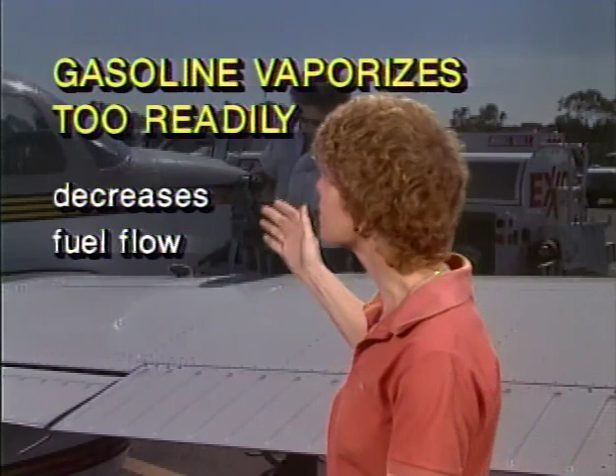Now, the measure of a gasoline's tendency to vapor lock is obtained by using the Reid vapor pressure test. The Reid vapor pressure test measures a gas's tendency to vapor lock. If aviation gasoline vaporizes too readily, the fuel lines will be filled with vapor, and that decreases fuel flow. It does not increase fuel flow, it decreases fuel flow because you've got vapor in the fuel lines.

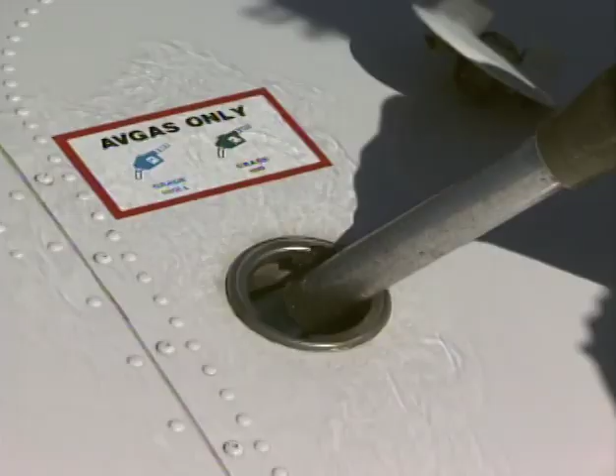The maximum vapor pressure allowable for aircraft fuel is 7 psi, and the allowable vapor pressure of aviation gasoline is lower than the vapor pressure of automotive gasoline. You have to be more careful about the vaporization characteristics of aviation gasoline because it goes up to high altitudes, so the allowable vapor pressure is lower than for automobiles.

Now, some aviation fuels are aromatic fuels, particularly the high-octane fuels, but a disadvantage of using aromatic aviation fuel is that it does deteriorate rubber parts. So you have to keep a much closer watch on those kinds of parts in the aircraft. It will deteriorate rubber, and in a lot of cases, synthetic rubber parts will have to be used.

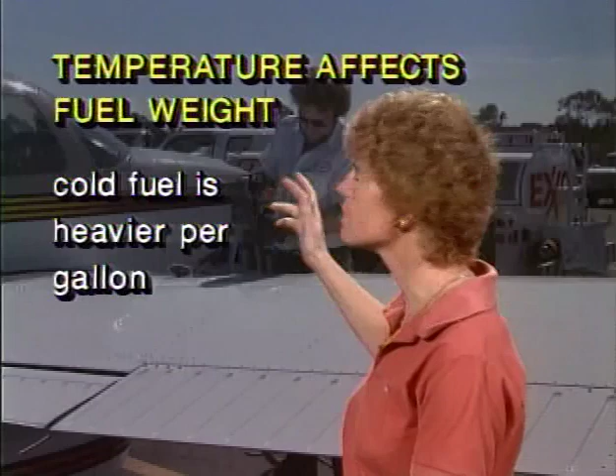Now, one of the things about fuel is that temperature affects the weight of the fuel, and cold fuel is heavier per gallon than warm fuel. The aircraft engine is really getting its energy by the weight of the fuel, so when you have cold fuel, you're actually going to have more energy available for the aircraft engine as far as the volume is concerned.

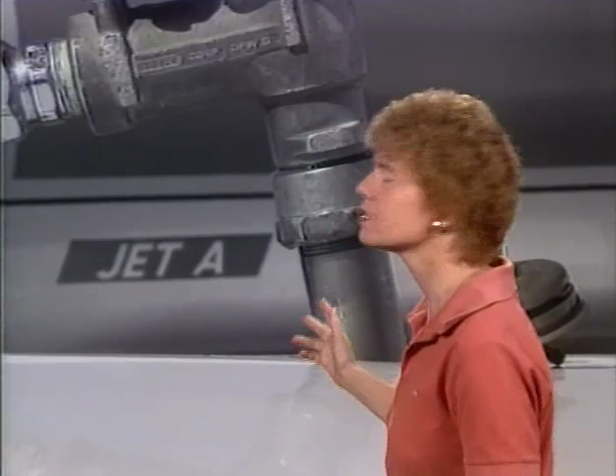Now, as far as jet fuels are concerned, jet fuels are more susceptible to water contamination than aviation gasoline is. The reason for that is because jet fuel, turbine fuel, is more viscous than gasoline is. It's thicker, and therefore it tends to hold that water in suspension. Using turbine fuels in aircraft has resulted in problems that you don't associate with aviation gasolines.

And one of the problems that comes along with turbine fuels as opposed to aviation gasolines is microbial contaminants, basically organic material growing in the turbine fuel. It's produced by various forms of microorganisms. They live and actually multiply in the water that is suspended in the jet fuel, what the FAA calls water interfaces of the jet fuels. They're multiplying in that water.

Now, if you've got microbial growth in a jet fuel tank and it's not corrected, all that growth will actually interfere with the fuel flow and the fuel quantity indicators. Also, that growth can cause electrolytic corrosive action in the metal tanks if you don't stop that growth.

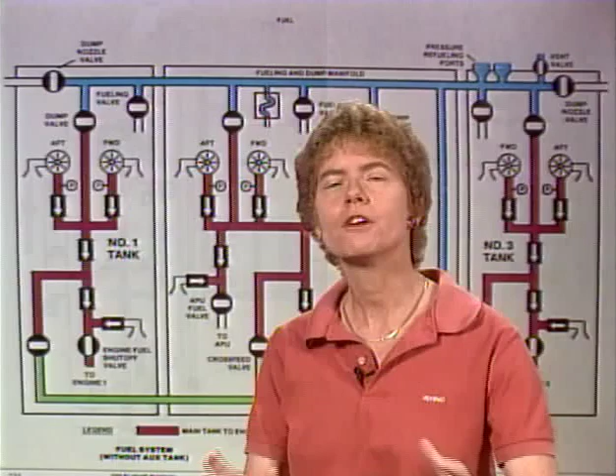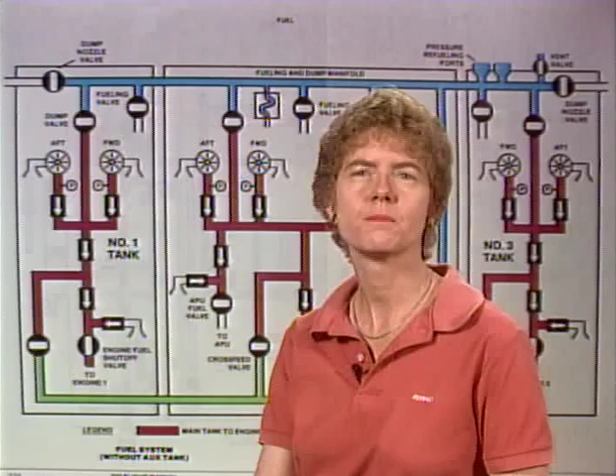Now let's talk about fuel system design. If you've got large aircraft like a 727, very typically you're going to have all kinds of lines running around between the tanks, between the engines, multiple manifolds in there. The whole purpose of that fuel manifold system is to let you move fuel wherever you want. First of all, the tanks can be serviced through a single connection. You can do pressure fueling with all the tanks serviced through a single connection.

In addition to that, any engine can be fed from any tank in the airplane, and that gives you redundancy, a lot of value in case you've got a problem with any one tank. All engines can be fed from all the tanks simultaneously. It just depends on how you set up the valves in the system. Gives you lots of options. And in addition to that, a damaged tank can be isolated from the rest of the fuel system.

If for some reason you get a leak in the tank or a lightning strike or any kind of damage, you can isolate it from the rest of the fuel system, and that's what a fuel manifold system allows you to do.

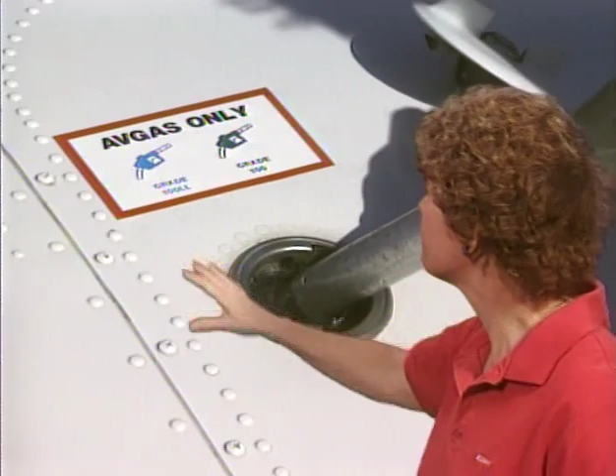Now, when it comes to fueling an airplane, in an effort to avoid people putting the wrong fuel into airplanes and thereby causing accidents, there are some minimum required markings that have to be placed on or near the fuel filler cover. For reciprocating engine-powered airplanes, those are the word avgas, so that you don't accidentally put jet fuel in it, and also the minimum fuel grade required. For instance, 100 octane or 100 low lead.

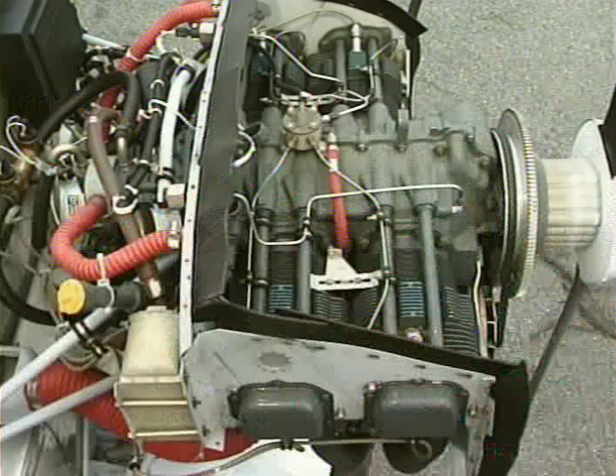If it was a turbine-powered airplane, instead of avgas, obviously it would say jet fuel. And the whole idea behind these required markings is that they want to make sure the airplane does not get misfueled.

Now let's assume that you're routing a fuel line like this one here between two rigidly mounted fittings. The way you want to do that is to have at least one bend between the fittings, and the idea behind that is strain relief that will help prevent the line from cracking. You do not have to use flexible hose, but what you do want to make sure of is that you've got at least one bend in it to help relieve the strain.

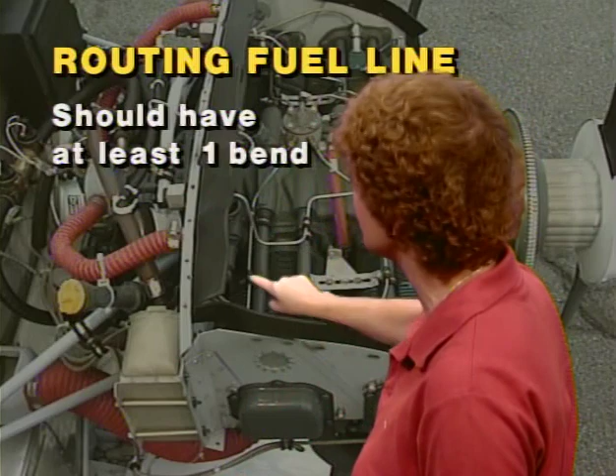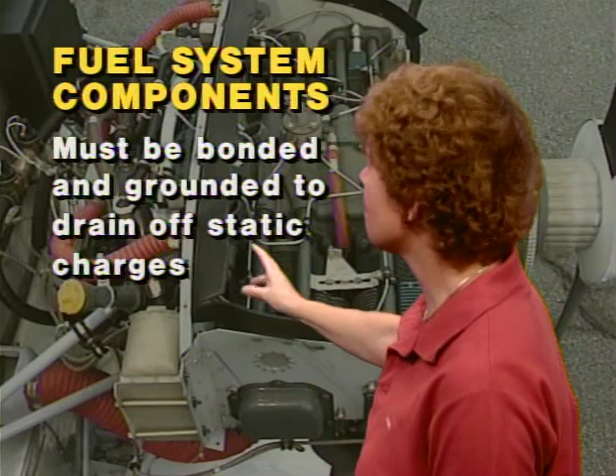Now, fuel system components must be bonded and grounded, and the idea of that is to drain off static charges to prevent sparks and thereby prevent fires and possibly explosions.

The main fuel strainer will be located down at the lowest point in the fuel system. Usually it's going to be on the bottom of the cowling, one side or another in the engine compartment area. And the purpose of it is to trap any small amount of water that may be present in the fuel system. And that is the main strainer down at the lowest point in the fuel system.

A lot of times with a lot of aircraft, you've got a gravity feed fuel system that can supply fuel to the engine from more than one tank at a time, like this 172. And in that case, the air spaces between the tanks have to be interconnected in order to vent those tanks properly.

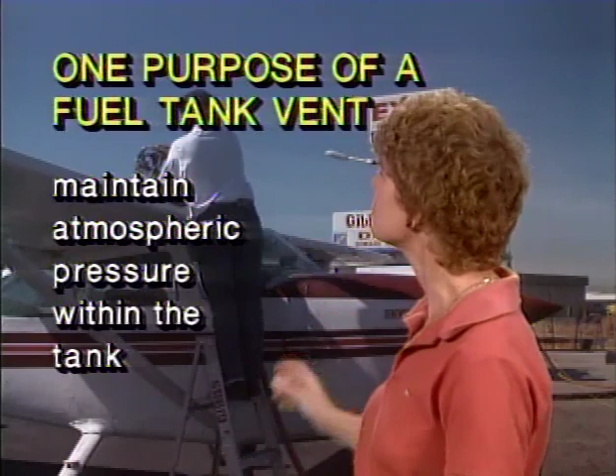Let's talk about those fuel tank vents. One purpose of the fuel tank vent is to limit the pressure differential between the tank and the atmospheric pressure. What our vents are trying to do is to maintain atmospheric pressure within the tank, and the whole purpose of that is so that the fuel will flow down to the engine properly in that feed system.

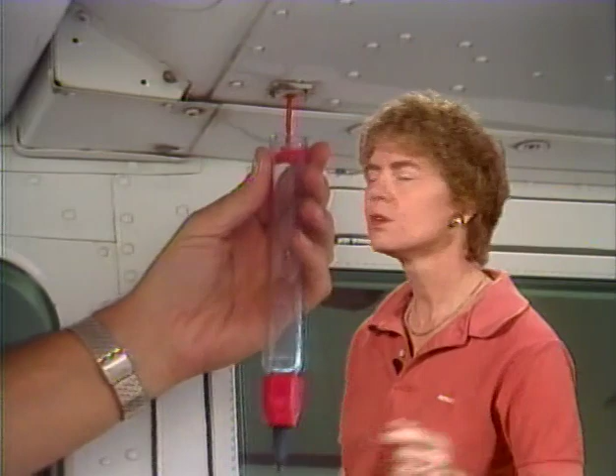Now, on the bottom of the tanks, you're going to have a fuel tank sump. And the primary purpose of that fuel tank sump is to give a place where the water and dirt accumulations, whatever's accumulated in the tank, can be collected and drained out, and give you a chance to check it and see if you're getting any contamination in the tank.

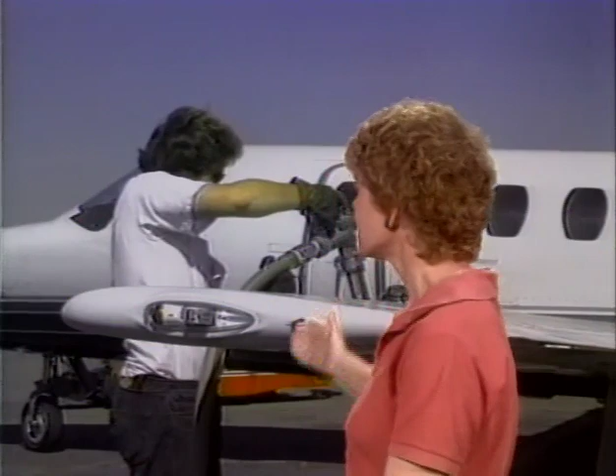There's a number of different ways that fuel tanks can be placed in an aircraft. One way is what is called an integral fuel tank. A Citation, for instance, and a lot of other planes have an integral fuel tank, and a more common name for it is a wet wing. The integral fuel tanks, or the wet wing, are formed by the aircraft structure itself. There's no other tank, there's no other bladder or anything. It's simply formed by the aircraft structure.

And the reason that integral fuel tanks are used in a lot of aircraft, particularly in larger aircraft, is to reduce the weight. It gives you a lot less weight if you can use the structure of the wing itself in order to create the fuel tank.

Now, in the fuel tanks, you're going to have flapper valves that are used as check valves in order to keep the fuel from going back away from where you want it to be, for instance, around the boost pumps. Flapper type check valves, for instance, are used in integral fuel tanks, and what they're used for is to prevent the fuel from flowing away from the boost pumps. So as the fuel accumulates around the boost pumps, those flapper type check valves keep the fuel there, prevent it from flowing away.

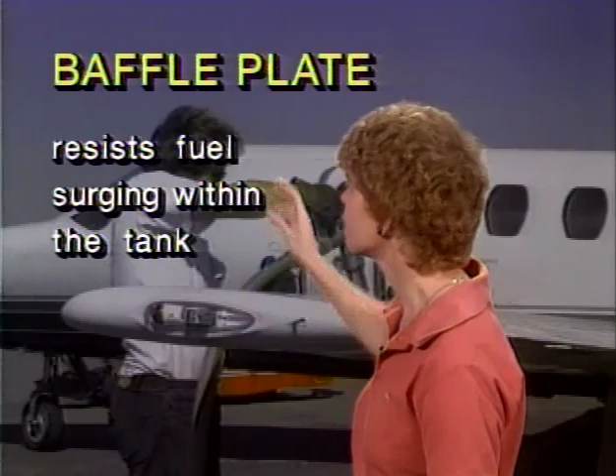Now, fuel tanks will also have baffle plates in them, and the purpose of a baffle plate in a fuel tank is to resist the fuel surging back and forth within the tank. It slows the fuel down and keeps it from sloshing and surging around.

Some aircraft, for instance the Cessna 182, have got bladder type fuel tanks. The bladder type fuel tank is just what its name says, a bladder that goes inside the aircraft wing, and that's what holds the fuel.

Now, if that's going to be left empty for an extended period of time, for instance, the airplane is going to be not flown for a long period of time, then the inside of that tank needs to be coated with a film of engine oil, and the reason for that is to make sure that the bladder tank does not deteriorate. Coat the inside of it with a film of engine oil.

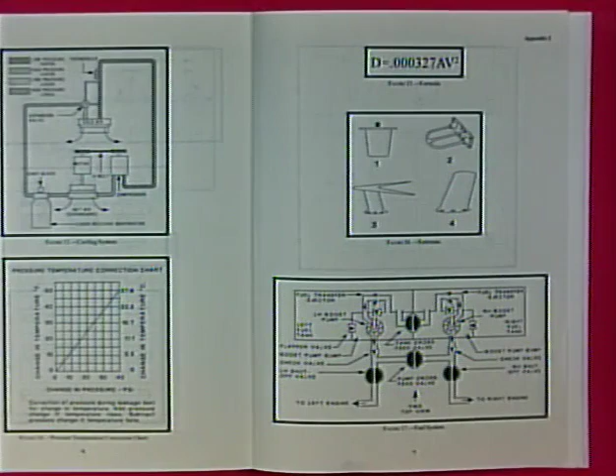If you have a multi-engine aircraft, what you're going to have is a fuel cross-feed system. So take a look in the FAA's Appendix 2 at Figure 17. And it shows the fuel cross-feed system on a twin-engine aircraft. The primary purpose of a cross-feed system is to allow you to feed any engine from any tank. You can feed any engine from any tank. That gives you a lot of flexibility.

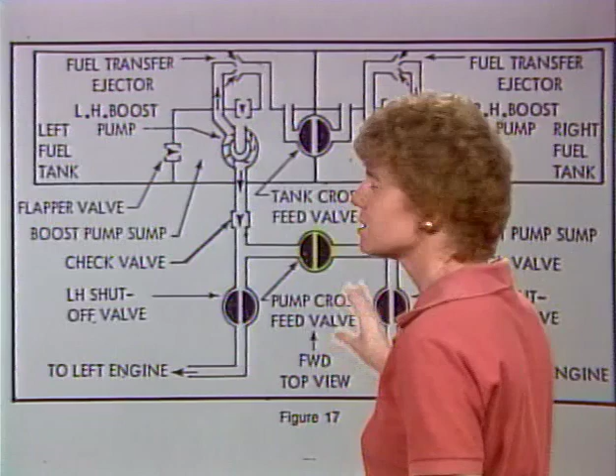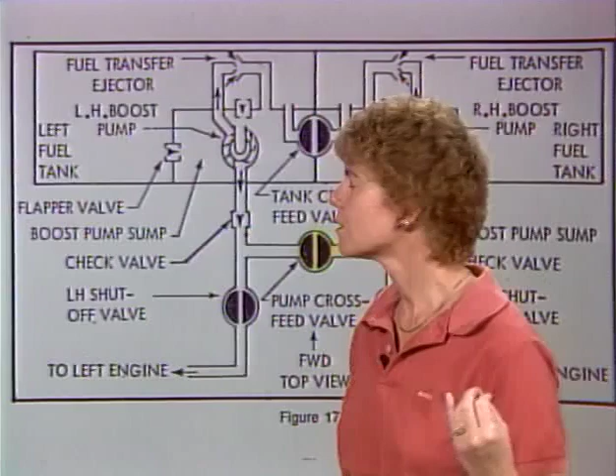Now, there are various valves in this cross-feed system, and they're going to ask you what the purpose is of the pump cross-feed valve. There is a tank cross-feed valve, and then down in the center of Figure 17 there is a pump cross-feed valve, and the purpose of the pump cross-feed valve is to allow the operation of both of the engines from one tank. This cross-feed valve is not to allow you to pump fuel from one tank to another. That's what the tank cross-feed valve does, but the pump cross-feed valve allows you to operate both the engines from one tank.

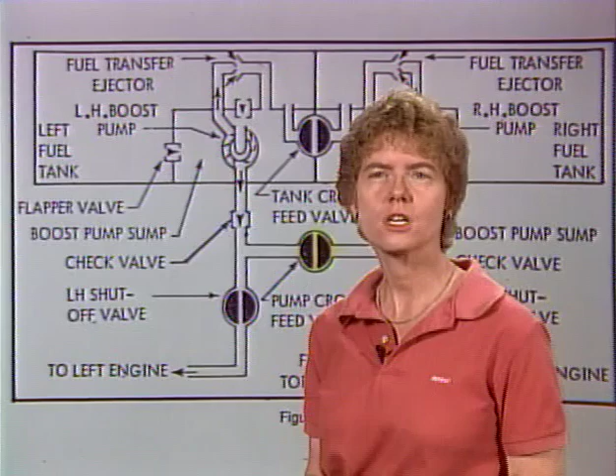Now, the cross-feed systems are used in multi-engine aircraft primarily to maintain a balanced fuel condition. If you've got more fuel in one tank than another, you can feed both of the engines out of one tank, balance the load, and then go back to feeding each engine off of its normal tank.

Let's talk about fixing fuel tanks. Sometimes you need to repair a fuel tank. Now, if you're going to have to repair a fuel tank, you need to empty the fuel out of it first. And you want to avoid conducting any defueling and tank purging operations in any enclosed space. Do not do it in an air-conditioned building or any enclosed space. You want to be out in the open air in a well-ventilated area.

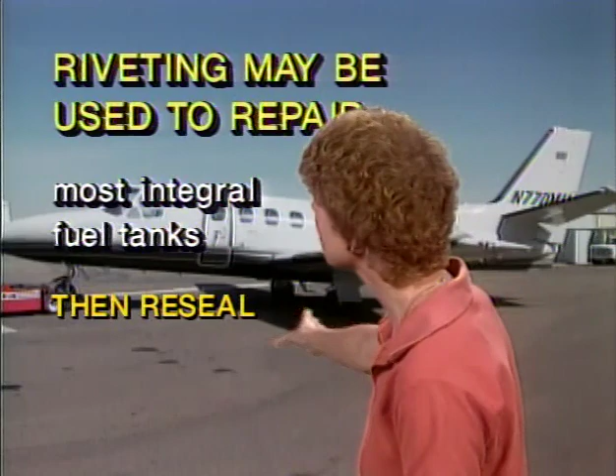Now, an integral fuel tank, one that's basically the wet wing, you should purge with carbon dioxide, with CO2, before you try and do any repairs on it. You want to make sure that the fuel vapors are out of the tank before you start doing any repairs. When you're repairing integral fuel tanks, riveting can usually be used to repair those tanks because they are part of the basic aircraft structure, so you can use riveting as you would on the aircraft structure to repair those integral fuel tanks.

Now, some aircraft, such as an older 172, actually have metal tanks in the wings for their fuel tanks. Not rubber bladders and not wet wings, but actual metal tanks in the wings. If those need work on them, for instance, welding, what you want to do is take the tank out, but before you do any welding, make sure that you steam clean it very thoroughly. That way you'll get rid of any fuel or fuel vapors that might cause you a fire or explosion problem.

Now, when you're done, if you want to inspect that removable rigid fuel tank for leaks, the best way to do it is to pressurize the tank with air and then brush it with soapy water and look for bubbles. If you see bubbles, it means that the air is coming through into that soapy water and you've got some leaks. It's not practical to submerge the tank in water or to fill it with water in order to look for any streams or dribbles coming out. The easiest way is to simply pressurize it with air and then look at that soapy water to see if you have any bubbles indicating leaks.

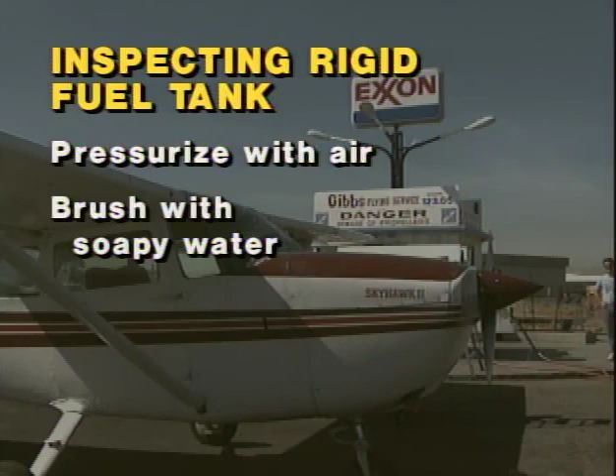Now let's talk about fuel pumps. First of all, boost pumps. The fuel boost pumps in an aircraft are operated to provide a positive flow of fuel to the engine. They prevent bubbles in the fuel after it leaves the tank if atmospheric pressure is lower than the fuel vapor pressure. And so that fuel pump basically helps make sure that the engine keeps running.

How much fuel pressure you've got on the outlet side of a centrifugal type fuel pump basically is regulated by the pump's design and its own internal clearances. It is not regulated by the speed of the engine, because when you're working with a submerged single-speed centrifugal type fuel pump like this is, it's regulated by the pump's design and its own internal clearances. That's what controls the outlet fuel pressure.

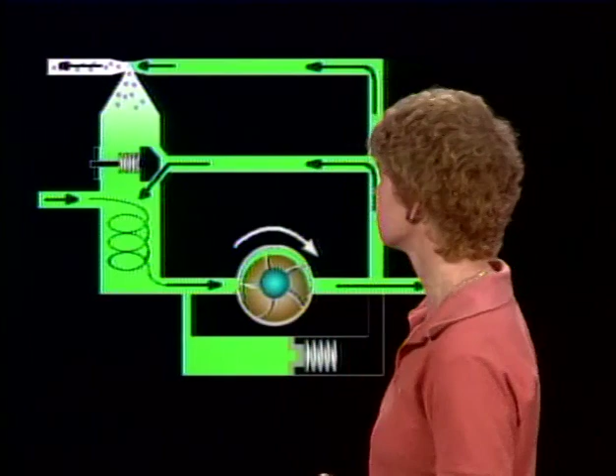A centrifugal type pump like this is not a positive displacement pump. The primary fuel pump on the engine does tend to be a positive displacement fuel pump, and a positive displacement fuel pump has to have a fuel pressure relief valve. It's required by the FAA regulations on a positive displacement fuel pump because it's always putting out the same amount of fuel through the pump, and the engine is not always able or ready to accept that much fuel pressure, and so you have to have a fuel pressure relief valve on a positive displacement fuel pump.

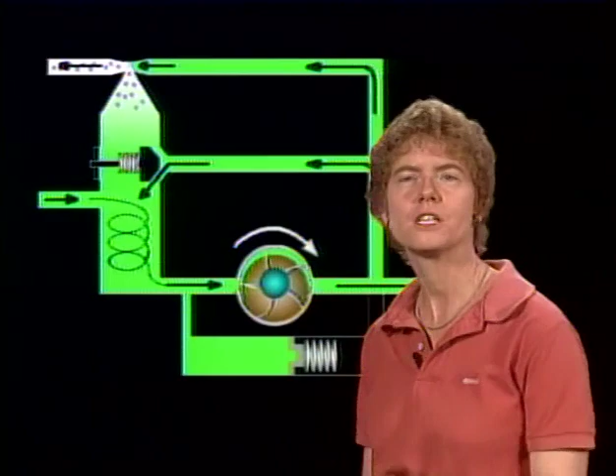Okay, so the FAA will say to you on the test, does a centrifugal fuel pump have to have a fuel pressure relief valve? Well, is a centrifugal fuel pump a positive displacement pump? No, it's not, and therefore it does not have to have a fuel pressure relief valve. On the other hand, they'll give you another question that says, do you need a fuel pressure relief valve on a sliding vane type fuel booster pump? A sliding vane pump is a positive displacement pump, and if it's a positive displacement pump, does it have to have a pressure relief valve? Yes, it does. So a pressure relief valve is required in a sliding vane fuel booster pump.

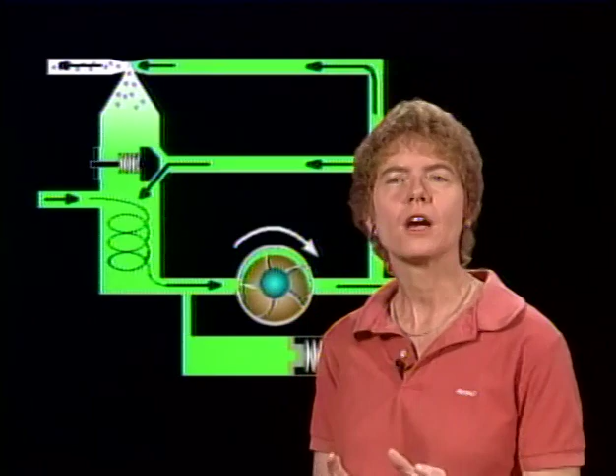Now, a vane type pump like this will also have a diaphragm in it, and the purpose of the diaphragm is to compensate fuel pressures for altitude changes, so that as the aircraft changes altitude, you get changes in the fuel pressures.

Let's talk now about our fuel quantity indicators, to figure out how much fuel there is in the aircraft. There's 4 basic types of fuel quantity gauges. There's electronic types. We're going to talk about all of these. There are electrical gauges, there are mechanical gauges, and there are sight glasses. Sight glass is pretty obvious. There's just a glass coming up. The old Yankees had it and a lot of other aircraft where you can actually see how much fuel there is up through the sight glass.

Mechanical ones, you see that, for instance, in the old Pacers, where you've got basically a cork and a little metal wire sticking up out of it, and depending on how much fuel you've got in the tank, the cork and the wire bob up and down. Electronic and electrical, we're going to talk about in more detail in just a minute.

Now, as far as the calibration on these fuel quantity gauges is concerned, they have to be calibrated to read 0 in level flight if the quantity of fuel remaining in the tanks is equal to the unusable fuel supply. In other words, when you've used up all your usable fuel, the gauges should read 0. You don't want the gauges reading 5 gallons if the 5 gallons is not usable to the aircraft. So when you get down to the unusable fuel supply, those gauges should read 0. They should be calibrated that way in level flight.

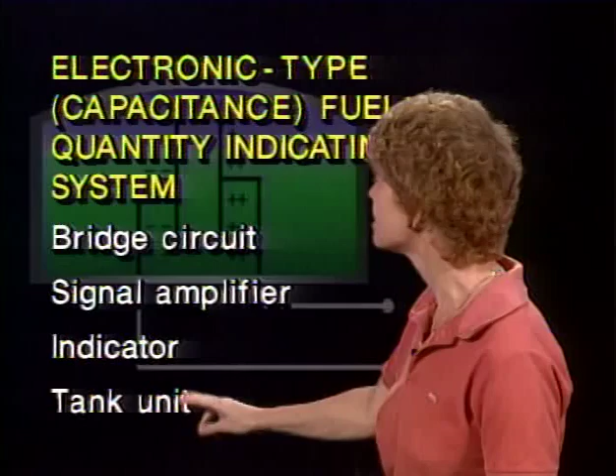Let's talk now about the electronic type or capacitance type fuel quantity indicating system. There's 4 basic elements on that capacitance type fuel quantity system. You've got a bridge circuit, you've got a signal amplifier, you've got an indicator in the cockpit, and you've got a transmitter unit, a tank unit that is sending the signal. Let's take a look at this unit and see what we've got there.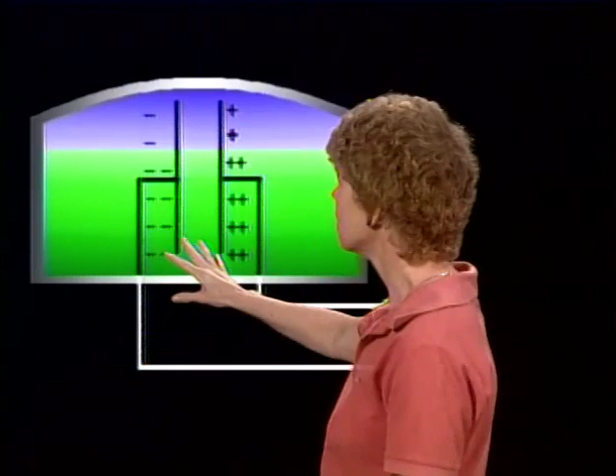In the tank, there are no moving parts as far as a capacitance type or electronic fuel quantity system is concerned. What you've got is a probe, or maybe several probes, that are installed in the fuel tank. This is the probe here, and here are the electrical wires that are coming out of it. We have fuel in most of the tank, but then we have air up above it. The probe or the tank transmitter basically is an electric capacitor. It's got fuel and air located above the fuel, which act as a dielectric. Now, a dielectric means a non-conducting material.

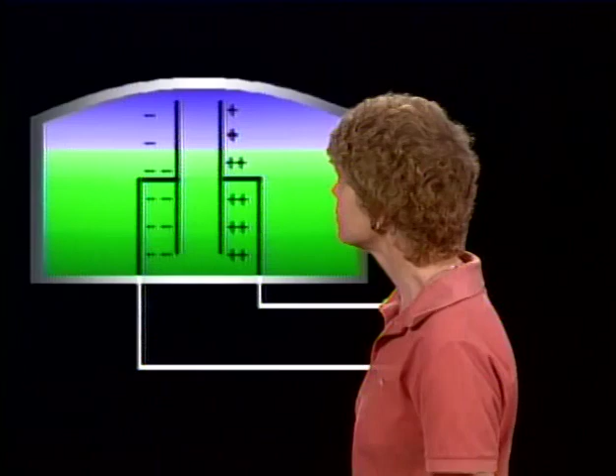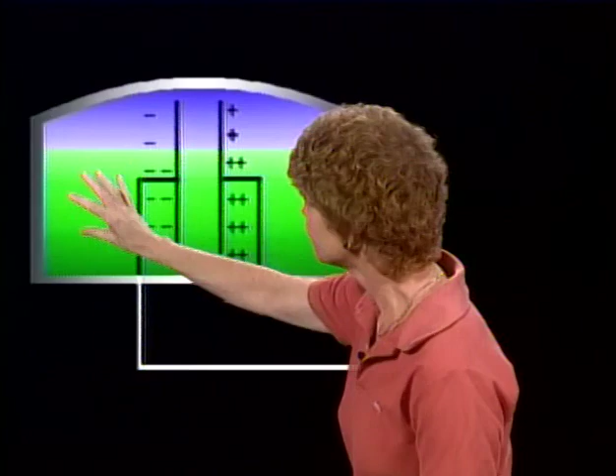So basically what you've got is you have charges trying to move from one side of the electric condenser, which is the probe, to the other. But you have the fuel and you have the air, which are the dielectric, the non-conducting material, between the 2 parts of the probe or the condenser. What happens is that the non-conductivity of the fuel and the air is different.

So how much electricity can move from one side to the other depends on what the ratio is between the fuel and the air in that tank. The capacitance type gauges tend to be very accurate because of the fact that they do not have any moving parts in them. And also, they're very accurate in measuring fuel level because they measure by weight. They measure by pounds rather than by gallons.

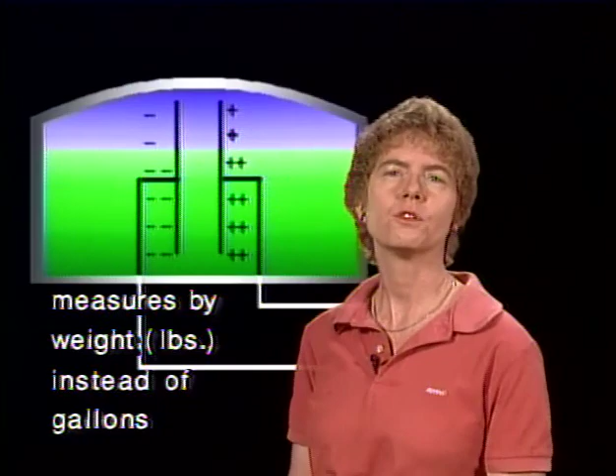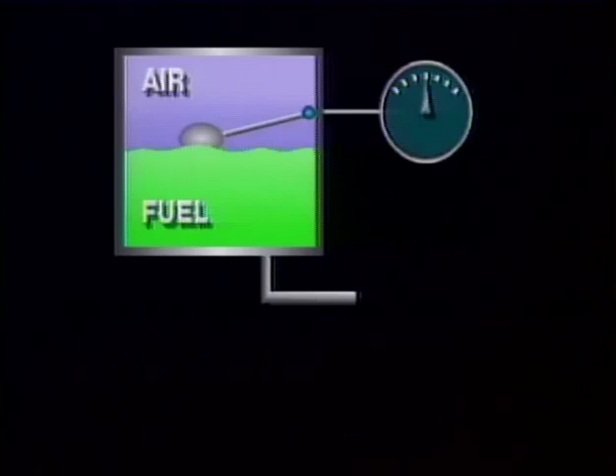And when it measures by pounds like that, instead of measuring in gallons, the measurement will be more accurate because the volume of the fuel varies with the temperature change. So fuel quantity measured in pounds instead of gallons is more accurate. You've always got the same number of pounds, but the gallons of fuel will change depending on what the temperature of the fuel is.

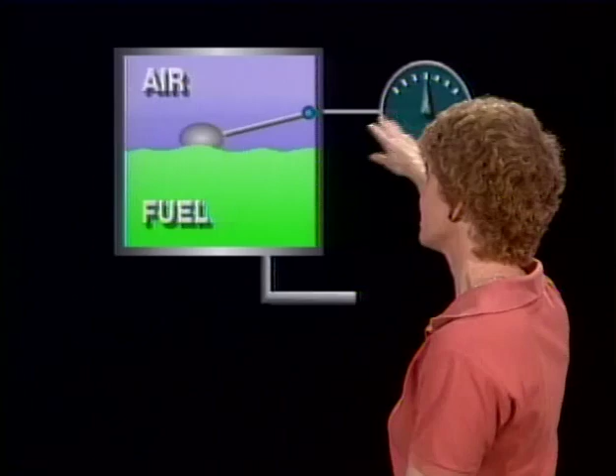Now, another type of fuel quantity system is the electrical type fuel quantity system, and what that's got is an indicator in the cockpit, and there is a float-operated transmitter in the tank. And the purpose of that float-operated transmitter is to send an electric signal to the fuel quantity indicator. It is not a mechanical connection. It's an electrical signal going from the transmitter in the tank, which is activated by the float, to the indicator in the cockpit.

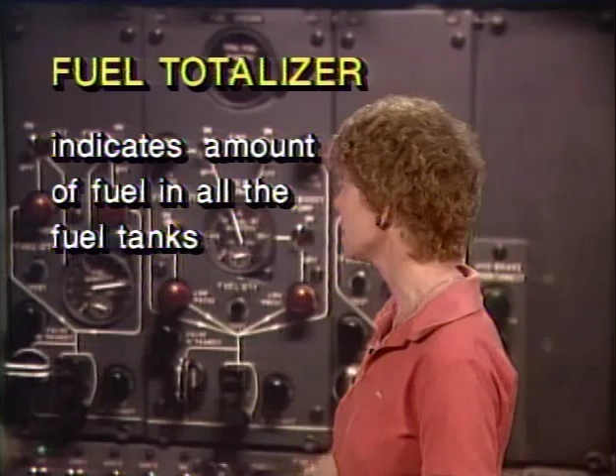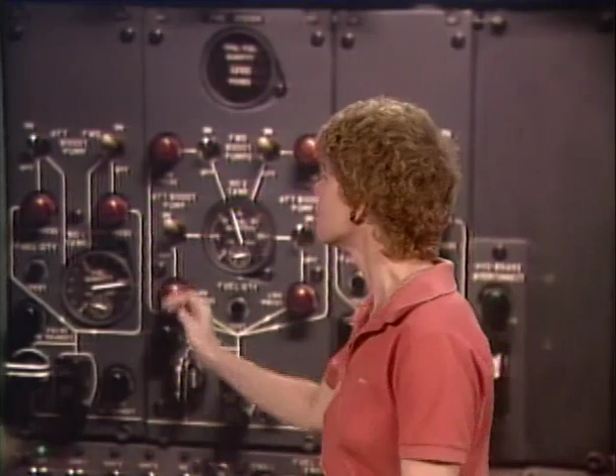Some aircraft have a fuel totalizer. The 727 is one of those, and the fuel totalizer indicates the amount of fuel in all of the different fuel tanks. In this case, 3 different tanks, and the fuel totalizer tells you how much you've got in all the tanks together. And that is one very definite advantage of the electrical or electronic fuel quantity indicating systems. Several fuel tank levels can be read on one indicator, and the indicator can be located any distance from the tank. You don't have to worry about a mechanical or visual connection, so you can put the indicator any distance from the tank that you want to.

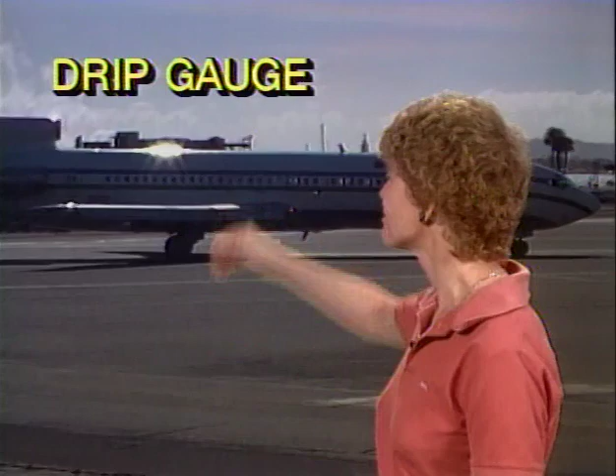Now, on large transport category aircraft, another way to measure the amount of fuel in the tank is to use a drip gauge. And a drip gauge, unlike what its name sounds, is not something you use to check if something's leaking, like fuel or oil. It's basically a visual way of measuring the amount of fuel in the tank using a gauge in the wing and basically filling it with fuel and seeing exactly when it starts dripping out the end. Drip gauge: measuring the amount of fuel in the tank.

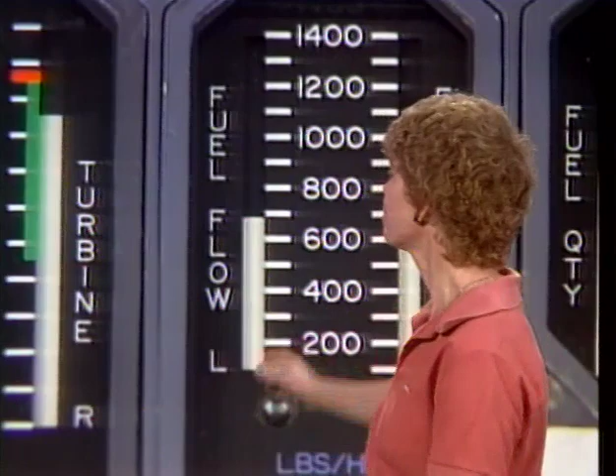Now, how do you tell how much fuel you're using? Well, one way is with fuel flow indicators. Fuel flow transmitters in the fuel lines are designed to transmit data electrically, so you get an indication of how much fuel flow is actually going through the engines. Some aircraft, instead of having fuel flow indicators, have fuel pressure indicators.

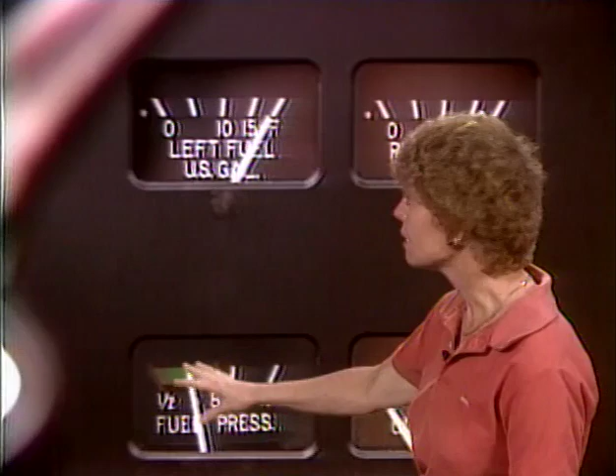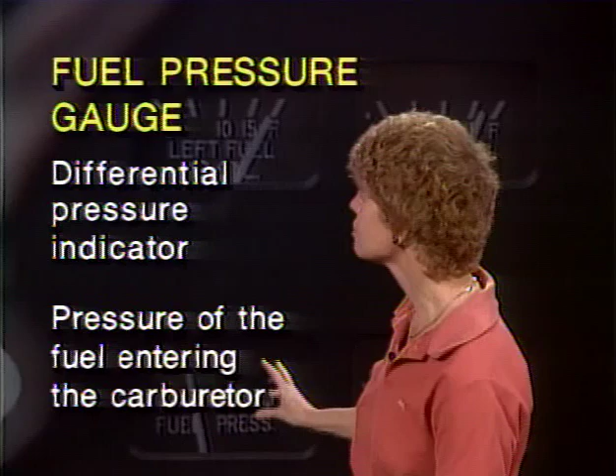A fuel pressure gauge, like you have in, say, an Archer, is a differential pressure indicator. It's a differential pressure indicator because it's using fuel pressure and ambient atmosphere in order to get a differential pressure indication. And the fuel pressure gauge indicates the pressure of the fuel as it's entering the carburetor.

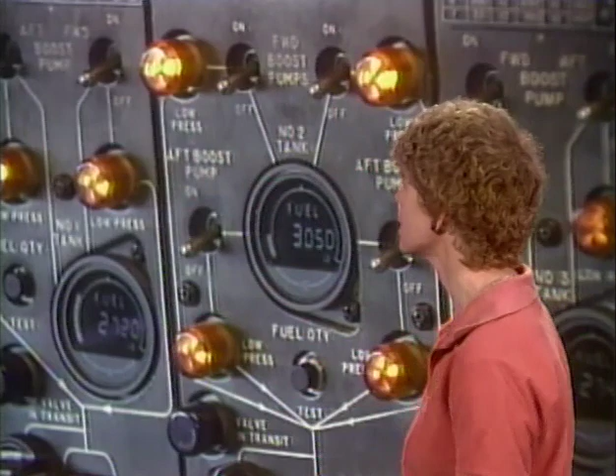Now, large aircraft, particularly multi-engine aircraft, will very often have a fuel pressure warning system. And that's what we've got with these amber lights on the 727. When they illuminate, you've got low fuel pressure. A fuel pressure warning signal system prevents you from allowing the fuel supply in one tank to become exhausted before you switch the selector valve to another tank, because when the pressure gets low, that light illuminates and tells you that you're running out of fuel.

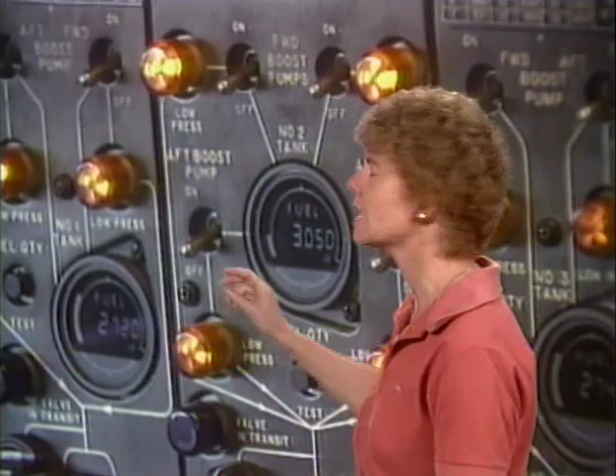The fuel pressure warning, therefore, gives you the first positive indication that you need a changeover from one fuel tank to another, because it tells you you're losing fuel pressure because you don't have enough fuel in the lines coming in. What it uses is a pressure-sensitive mechanism that actuates the fuel pressure warning system. And that pressure-sensitive mechanism can be adjusted to change where the fuel pressure warning lights come on. You can change the fuel pressure warning limits by adjusting the pressure-sensitive mechanism.

The transmitter in the fuel pressure warning system basically takes fluid pressure in the lines, however much fuel pressure there is in the line, and converts that to an electrical signal. And when the fuel pressure drops below the limits that you've set the mechanism for, the fuel pressure warning switch contacts close and the warning light comes on. Now, if you're dealing with a reciprocating engine aircraft as opposed to a turbine engine aircraft like we have here, the fuel pressure line of the carburetor is where the pressure is taken for the fuel pressure warning signal.

Now, if you're going to troubleshoot a system like this, you need to use the manufacturer's maintenance manuals because they're all going to be different, and you need to look at the maintenance manuals if you're going to do any effective troubleshooting on it.

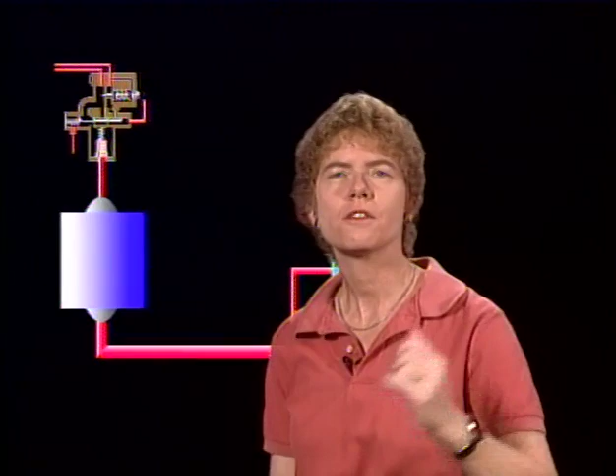Fuel system icing is another problem that gas turbine engines have, and the fuel systems in turbine engines are very susceptible to forming ice in the fuel filters. And you want to prevent the ice from forming in the fuel filters, and a very common way of doing that is to add anti-icing fuel additives. You can heat the fuel, which we'll talk about in a minute, but another way to take care of the problem is to add anti-icing fuel additives.

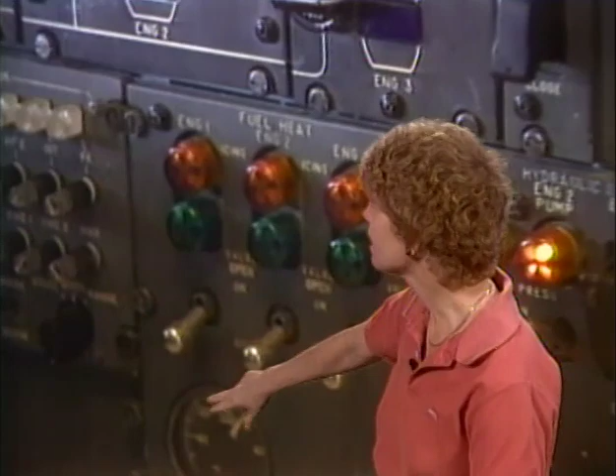Now, on some aircraft, what they do is heat the fuel. For instance, on the 727, you've got a fuel temperature indicator, a gauge right down here below the fuel heat panel. The fuel temperature indicator tells you when the fuel may be in danger of forming ice crystals because it tells you what the temperature of the fuel in the tanks actually is. Okay, that's nice. You know the temperature of the fuel in the tanks. What do you do about it? Well, you've got a fuel heat system.

And what the fuel heater does is it protects the fuel system from ice formation because it operates as a heat exchanger. It takes hot bleed air off the engine and runs it in a heat exchanger past the fuel, which warms up the fuel and prevents the ice from forming. The aircraft fuel heater can be used, by the way, to thaw ice in the fuel screen. If you actually have already gotten ice in the fuel screen, you can use that fuel heater to go ahead and thaw the ice.

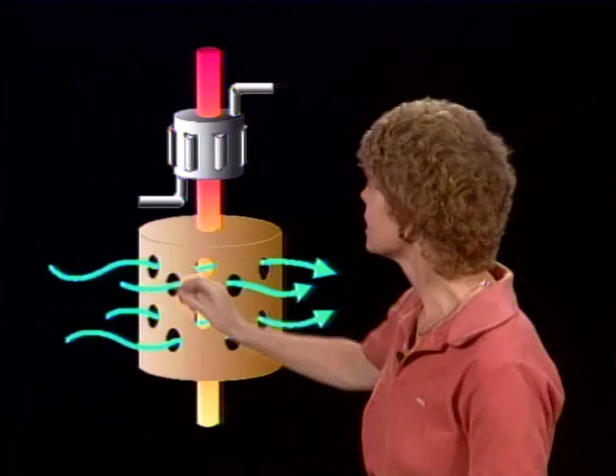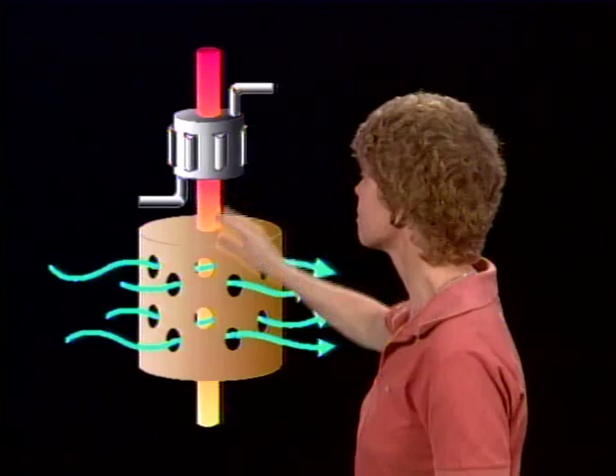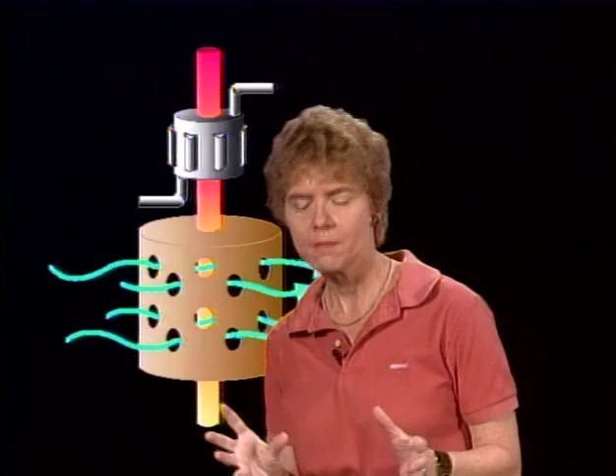Now, one way to heat the fuel is to use this engine bleed air. But another way to do it is to use the engine lubricating oil as a source of heat. Some aircraft have one or the other, some aircraft have both. So either engine bleed air or engine lubricating oil can be used as a source of heat for the fuel in order to keep ice crystals from forming in the fuel.

Some aircraft require that you have a good way to get rid of the fuel, to dump it. On this 727, the dump chute is out here on the right wingtip. There's another one over on the left wingtip, and that's how you jettison fuel, get rid of the fuel if you need to. You might need to get rid of it if you've just taken off and have an emergency and have to go back and land, and you have to get down below your landing weight.

Both transport category aircraft, like this airliner, and general aviation aircraft require a fuel jettison system under certain conditions if the maximum takeoff weight exceeds the maximum landing weight. Now, interestingly enough, what you really have to remember about this question is the regulation numbers for the regulations that cover the requirements for fuel jettisoning. Those are FAR 23, FAR Part 25, and CAM 4B. FAR 23 covers the airworthiness requirements for most aircraft. FAR 25 covers them for transport category aircraft, and CAM stands for Civil Aeronautics Manual, and that goes back to before the FAA was the FAA.

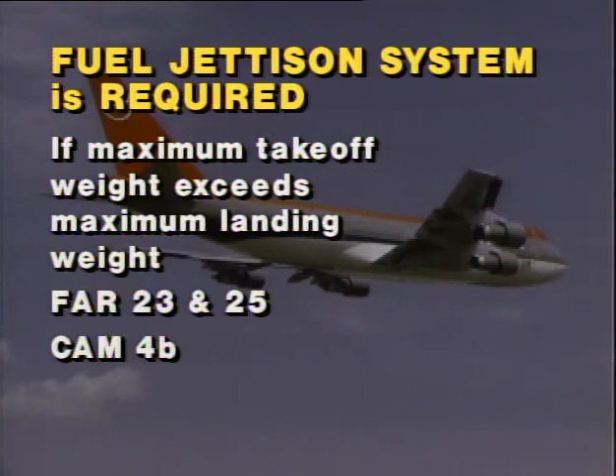Now, when you're dumping fuel, you don't want to accidentally dump all of your fuel. So dumping past the limits that the regulations prescribe is prevented by having dump limit valves or by having a low fuel level circuit. And the dump limit valves or the low level circuit will shut off the fuel dumping, will stop the fuel jettisoning when the fuel gets down to whatever the limits are that the regulations prescribed for that particular kind of aircraft.

Now, the way the fuel is usually jettisoned, the dumping is usually accomplished, is through a common manifold and outlet in each wing. So the tanks will all be connected together into a common manifold, and then it will dump out through an outlet, but you'll have one in each wing. The way you maintain lateral stability while you're dumping fuel is by having two separate independent systems on each side of the aircraft so that you don't get one wing of the aircraft heavier than another.

And the way you make that fuel move overboard is by boost pumps. In other words, you're turning on boost pumps that actually pump the fuel overboard. You don't want to depend on it to just flow out on its own. You want to make sure in a fuel jettison system that the whole system and the operation of the system are not going to be a fire hazard, that they're free of fire hazards.

And one of the requirements, as far as that's concerned, is that the fuel has to discharge clear of any part of the airplane. So you're not going to discharge it up in the middle of the belly because it's then going to be spraying back over the aircraft. A wingtip here or the very back of the airplane, someplace where it's clear of any part of the aircraft would be okay.

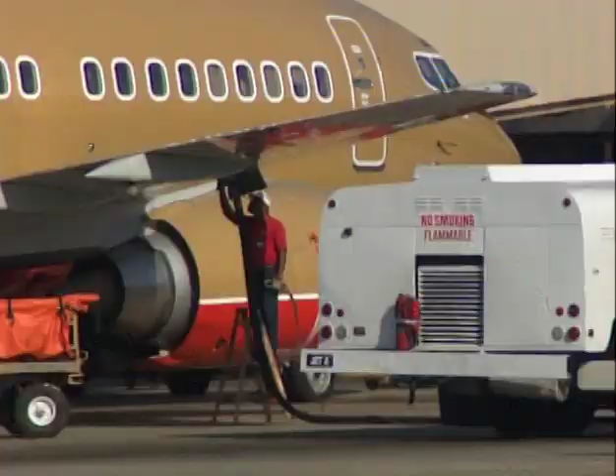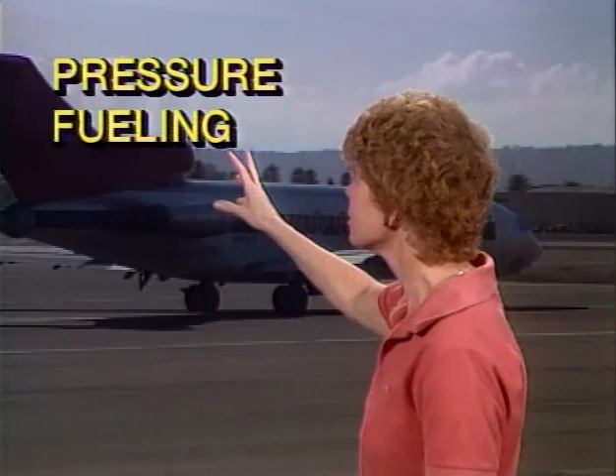Okay, we've gotten rid of fuel in the air, but how about when we're fueling aircraft on the ground? Transport category aircraft typically have a pressure fueling system. The pressure fueling system allows the aircraft to be fueled from one point under fairly high pressure, makes it a lot quicker and a lot easier. But they vary with the different aircraft manufacturers. And so the fueling operator, whoever's doing the fueling, must consult the aircraft manufacturer's instructions for the detailed procedures to be followed. You cannot assume that because you know how to do it on one airplane, you automatically know how to do it on all aircraft.

Pressure fueling is a lot more practical than the over-the-wing fueling that's used for most general aviation aircraft. It's much more practical for large aircraft because it saves a lot of time. There's a single point on the aircraft that you have to hook up to, and you can fuel the entire aircraft from there. Now, for small aircraft, general aviation aircraft, pressure fueling is much less of an advantage.

And the reason that it's less of an advantage for small aircraft is the limited fuel tank area. A 727 has got a lot of fuel tank. You've got to put a lot of fuel in, and it really makes it handy to be able to hook up to one connection and pump it in under high pressure. Small aircraft, it doesn't make that much difference because you don't have that much fuel tank space or area. You don't have that much volume of fuel.

Now, one of the flight-related advantages for safety that a pressure fueling system has got is that it reduces the chances for fuel contamination. Because you have a tight fit to the wing and you're pumping the fuel in under pressure, you have a lot less chance for fuel contamination from dust or water or whatever might be running around in the air. That is a flight safety related advantage. There are other advantages, but that's the one they want you to remember as far as flight is concerned.

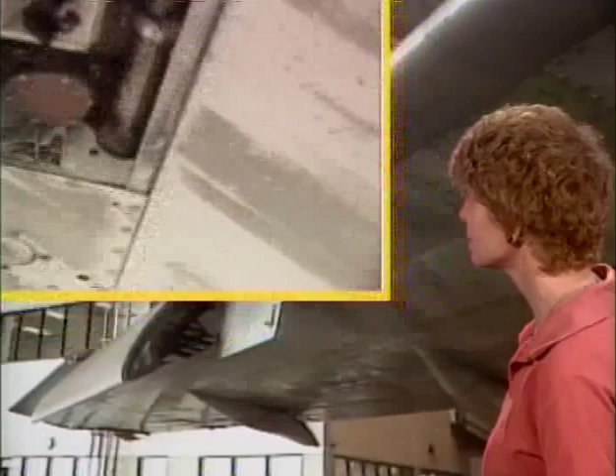Now, how do you do pressure refueling? In the 727, the refueling station is out here on the right wing. This is the panel that comes down to show you the valves and lines and instructions that are inside. And inside there, you've got your hose connections, you've got indicators and various valves you can turn. You'll have a panel that tells you what the instructions are.

So for a pressure fueling system, you've got a pressure fueling hose and a panel of controls and gauges that allow one person to either fuel or defuel all of the fuel tanks or any single fuel tank on the aircraft. And the instructional procedures are normally placarded on the fuel control panel access door, so you know exactly what you're supposed to do.

Now, before you start pressure fueling an aircraft, one of the things you have to do is make sure that the pump pressure on the fuel truck is correct for that refueling system. They are different. You have to check and see what you need, and then make sure that the pump pressure on the fuel truck matches the fueling system for that particular aircraft. During fueling operations, you want to make sure that the fuel you're supposed to use is appropriately identified. You want to use the right fuel for the right type of aircraft.

Now, even if you fuel an aircraft from a truck or a storage tank that you know is not contaminated with dirt or water because you've been checking the tank or the truck, you still have to do periodic checks of the aircraft's fuel tank sumps and system strainers. It still could have contamination because you can get contamination from other sources. Water just from condensation. You can get particles in the fuel from the system itself.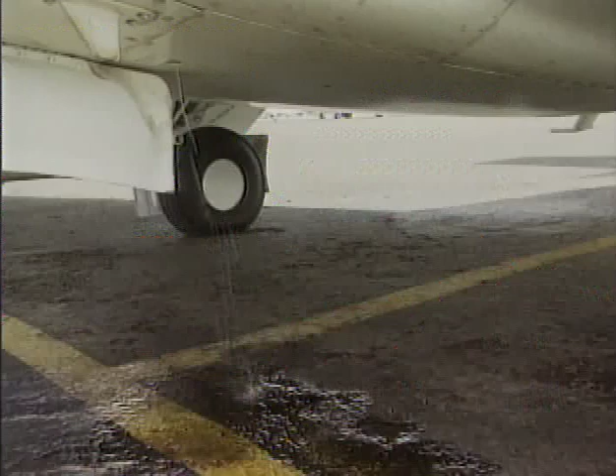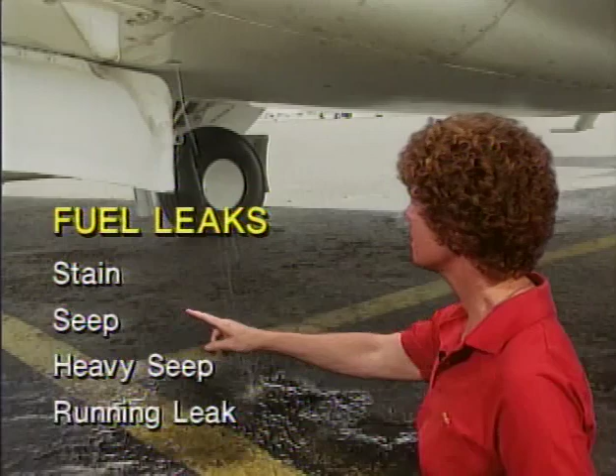Let's talk for a minute about fuel leaks. Fuel leaks are usually classified as either a stain, a seep, a heavy seep, or a running leak. A running leak is the only one where fuel is actually dripping off of the aircraft, and the only one that's going to automatically ground the aircraft. If fuel is actually dripping off of the aircraft, then it needs to be grounded and have that fuel leak fixed.

As far as stains, seeps, or heavy seeps are concerned, whether or not they ground the aircraft depends on exactly where they're located, whether they're in a vented or unvented area, and also on exactly how heavy that fuel leak is. As a general rule, stains, seeps, and heavy seeps, in addition to running leaks, are considered to be flight hazards if they're located in unvented areas of the aircraft. What you do not want is for fuel vapors to build up in an unvented area of the aircraft. So even if the leak is only a stain, a seep or a heavy seep, if it's in an unvented area, that is generally considered a flight hazard.

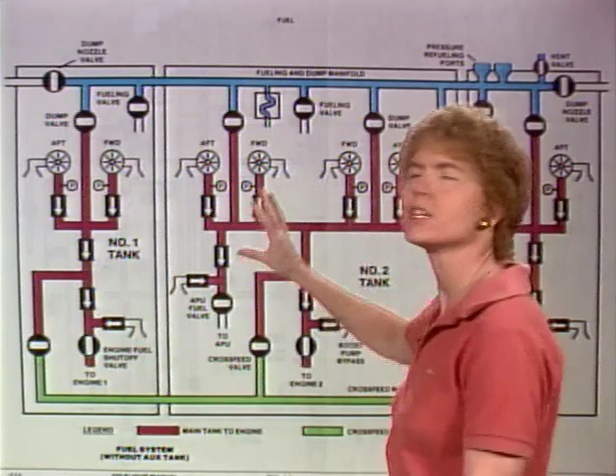Now, if you're trying to troubleshoot a fuel leak in a large aircraft fuel system, a schematic of that fuel system would be very important to use. The larger the aircraft is, the more important it is to have the schematic available to you. Observing the fuel pressure gauge and operating the selector valves will help you to locate leaks and defects in the internal portions of the fuel system.

When you're inspecting a fuel system, all the valves located downstream of the boost pumps should be inspected with the boost pumps operating to see if those valves leak fuel with the boost pumps pushing fuel towards them. If you want to check for internal leakage of a fuel valve without removing it from the aircraft, place the valve in the off position, drain the strainer bowl, turn the boost pump on, and watch to see if fuel flows into the strainer bowl, because with the valve off, fuel should not be able to move through even with the boost pump pushing on it.

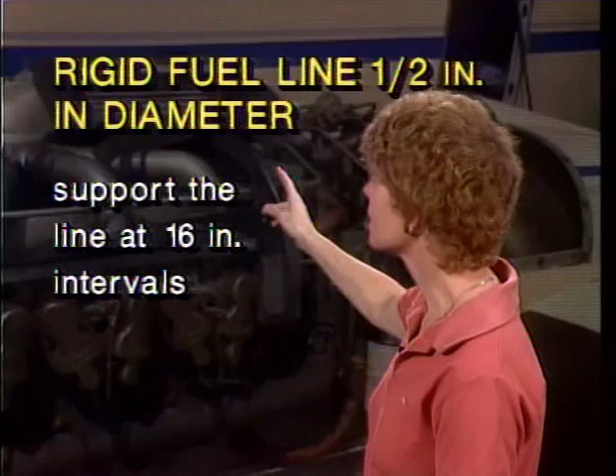Now, when you're installing a rigid fuel line 1/2 inch in diameter, that line needs to be supported at 16-inch intervals. So 1/2 inch fuel line needs to be supported at 16-inch intervals. And that covers what you need to know about the fuel and fuel systems for the airframe course.